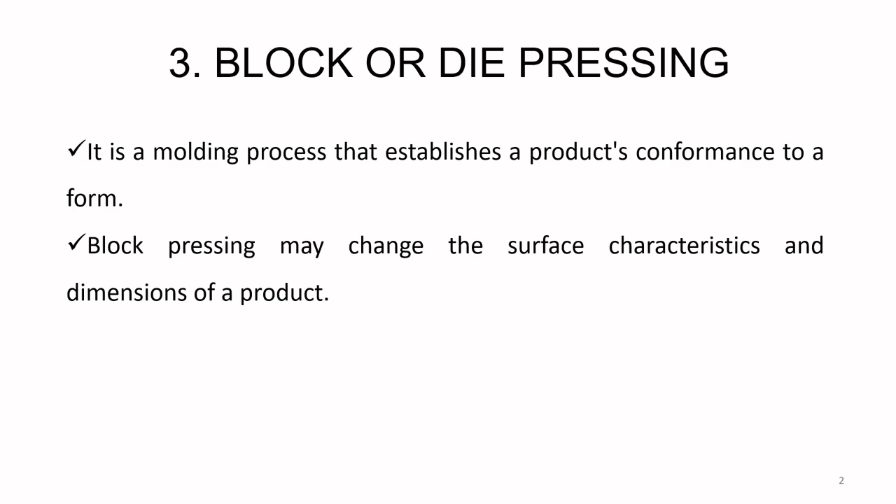Now, a factory which is doing all kinds of garments would not use this kind of die pressing. But someone who is only doing formal shirts will definitely buy this machine, because the ironing quality that you will get from this machine for the cuff and for the collar, that quality you will not be able to achieve from the handheld iron. That is not possible. So someone who only does formal shirts will definitely buy this particular machine.

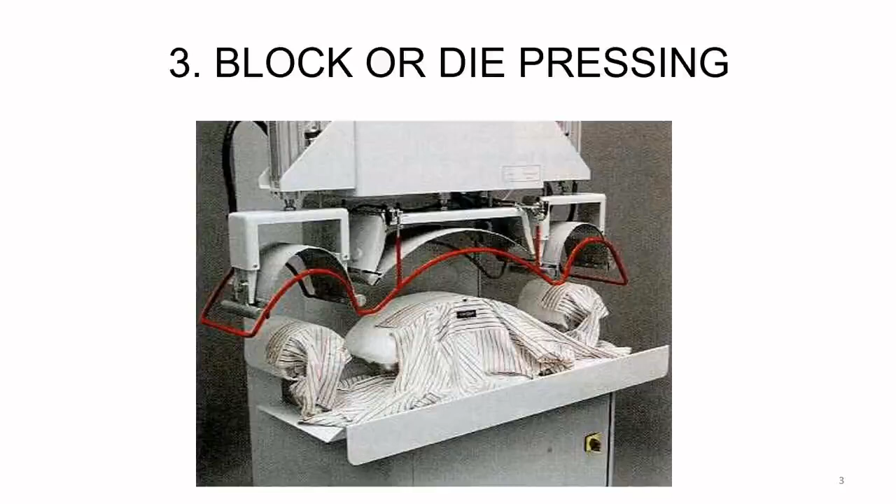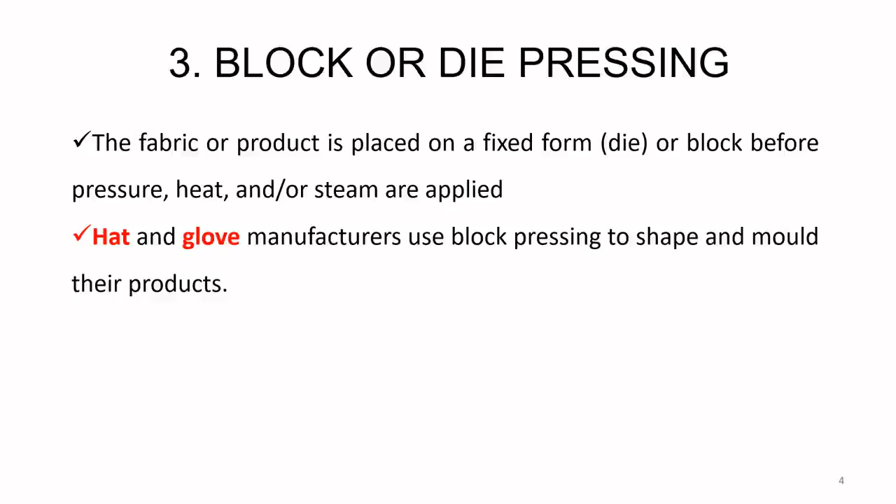Now, in case of block or die pressing, the fabric or product is placed on a fixed form or die or block before pressure, heat, and or steam are applied, like we saw in the previous slide. Hat and glove manufacturers use block pressing to shape and mold their products. The gloves that are used for taking out the dishes from the oven, because the plate is very hot, that glove has a particular shape to it. So the glove manufacturers use block pressing to shape and mold the products.

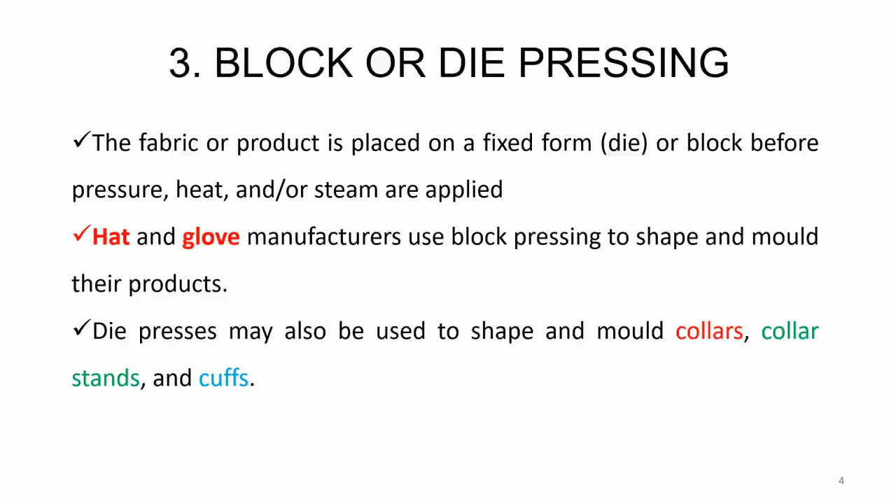Die presses may also be used to shape and mold collars, collar stands, and cuffs. That's what we saw in the previous slide. And block or die pressing can be used to fold and crease patch pockets and pocket flaps. And it's all automatically done. The operator positions the component over a die, whatever has to be pressed. So let's say it is a patch pocket. You place the patch pocket over the die.

Second, you switch on the machine. Third, there are folding blades which fold the edges of the pocket and hold the edges to the underside for the creases to be set. So imagine a pocket has been kept, it is folded from all three sides, and then it is lifted and put onto the shirt front, and then the stitching machine attaches the pocket to the shirt front. So the entire thing is automated, and the pocket may be automatically sewed.

There are dozens of videos on YouTube in which you can see that on one side of the machine, the shirt front, mostly the pockets are attached to the left side of the shirt, so the left front of the shirt is kept at one end. On the other side, you just place the pocket at the right place. The folders are going to fold the pocket from all four sides, lift and place the pocket on the front of the shirt. And then the stitching system is going to attach the pocket to the garment. It's the most beautiful piece of machinery.

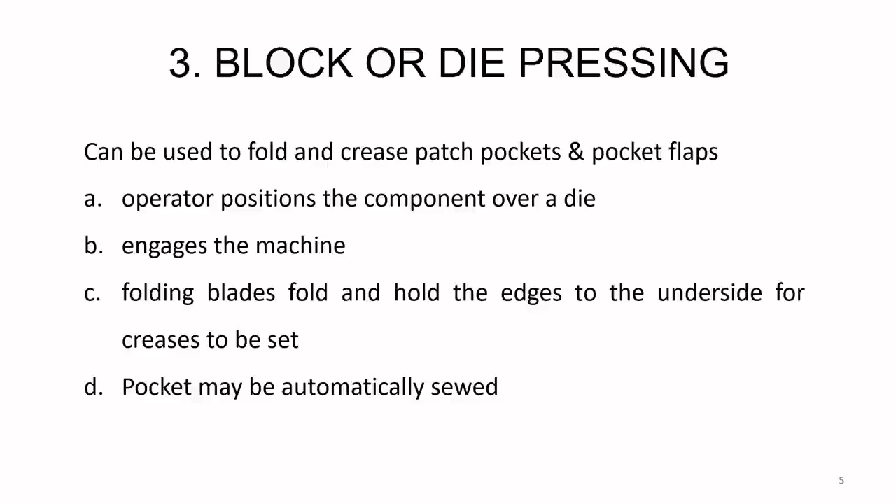So with that, we come to the fourth type of pressing, which is the form pressing. Now, form pressing is used primarily for the final pressing or for renovating garments in dry cleaning plants. So this is something which happens at the last, not in the initial stage. And form presses are made in approximate shape as the finished garment.

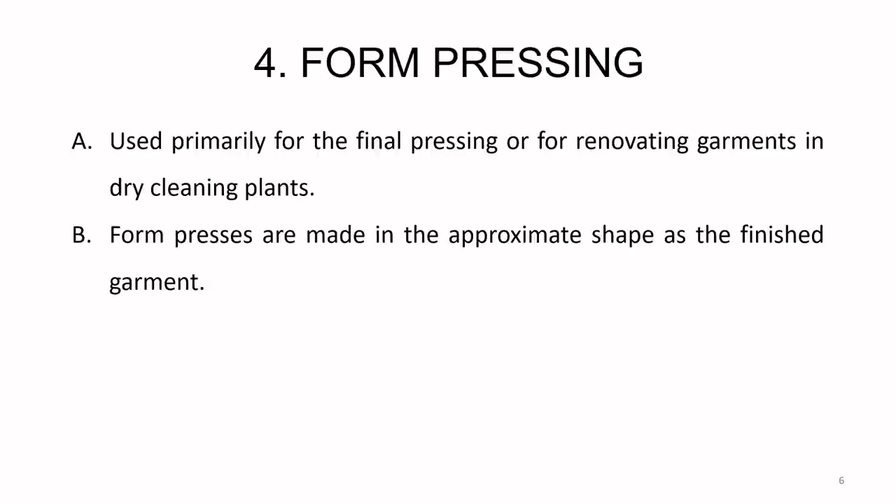And we are going to see the visuals, which is going to make it fairly easy to understand how the form pressing is done. And the expandable or collapsible bags are the most common type, like the example that we had discussed in case of pressure being applied using steam. So form pressing is that case where pressure is applied using steam, and the mechanism is that expandable or collapsible

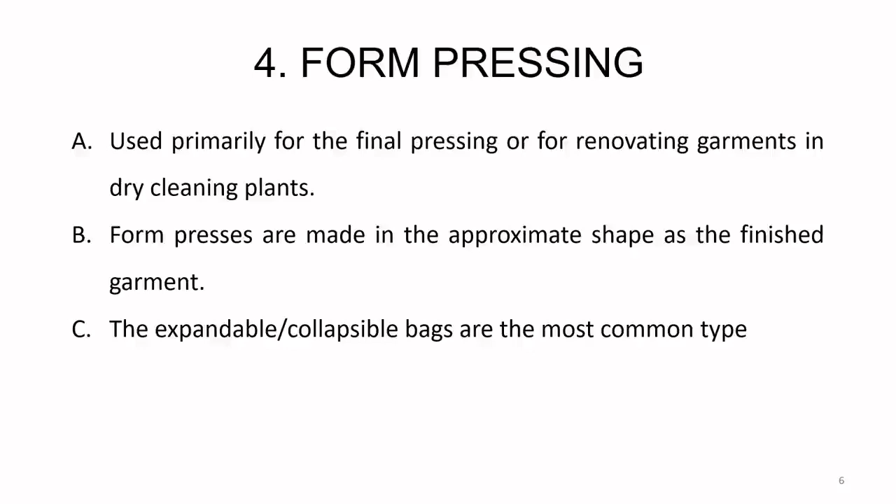bags are used. They are put inside the tubular parts, which is sleeves or the leg part of the trousers, and the steam is supplied inside these bags. The bags expand, and when they expand, they apply pressure to the garment part, and we'll see how.

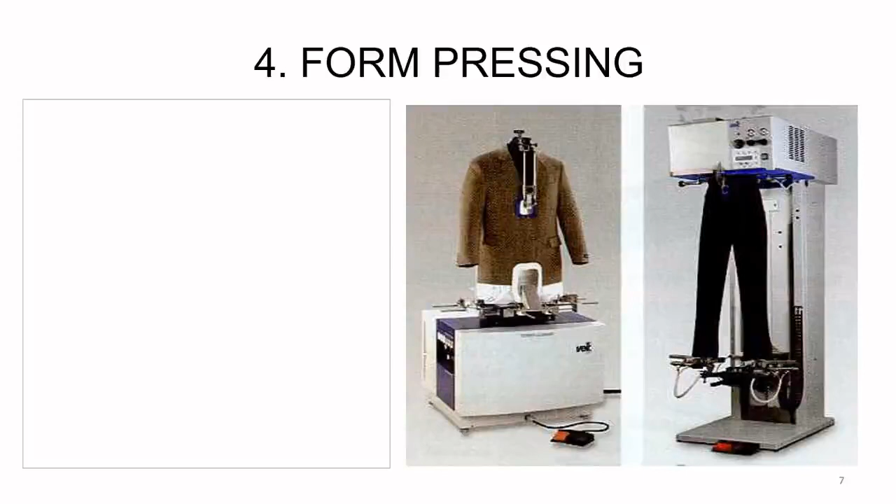So if you see the visual, there's a jacket which has been mounted onto the mechanism, onto the form press. On the right side, we have the trouser. It has been clamped at the bottom and at the top, and there is a balloon kind of thing, the collapsible bag, inside the jacket, as well as inside the two legs of the trouser.

Steam is forced from the inside of the form through the garment, while the form expands to fill all the space inside the garment. So that balloon kind of thing, or the bag, expands fully, and when it expands, it is going to apply pressure against the jacket or the legs of the trouser. It is expanding, it is applying pressure, and because there is steam inside, steam is being used to press the garment.

Form presses require the least amount of positioning and repositioning. Once you have put the jacket onto the form press, or you have clipped the trouser at the top and the bottom, that's it. You just have to press a button. Steam is going to fill the collapsible bag. It's going to inflate. It's going to press the garment for a certain number of seconds, and there you are done. You can remove the garment, put on the new garment, press the button, and again it will be done.

So in this case, you don't need a skilled person. You don't need a pressing man. You just need a helper kind of a person who simply is taught how to put the garment onto the form. That's it. Garment is pressed with one surge of steam. You press a button, steam will go inside, pressing is done. Next. That's it.

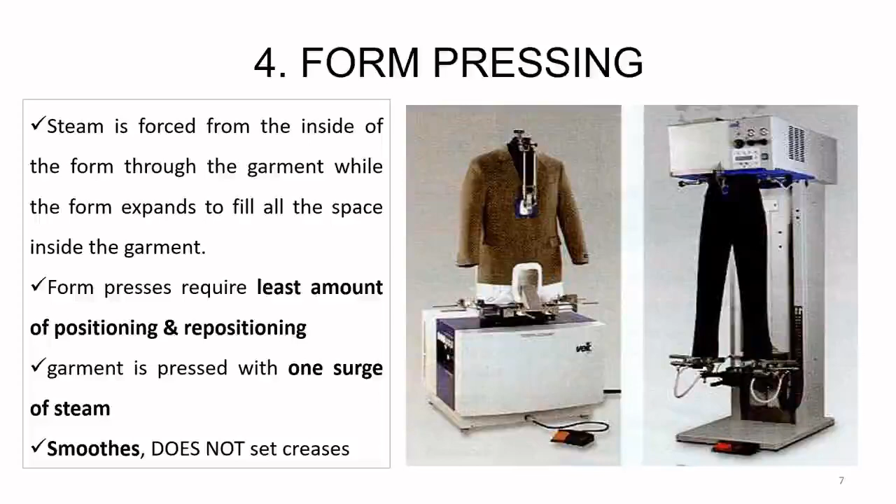One thing here, it smooths. It cannot set creases. It can only smooth. So whatever tubular parts you have in a garment, the collapsible bag will just inflate itself and it will press the garment using steam. That's it. You cannot set creases using form pressing.

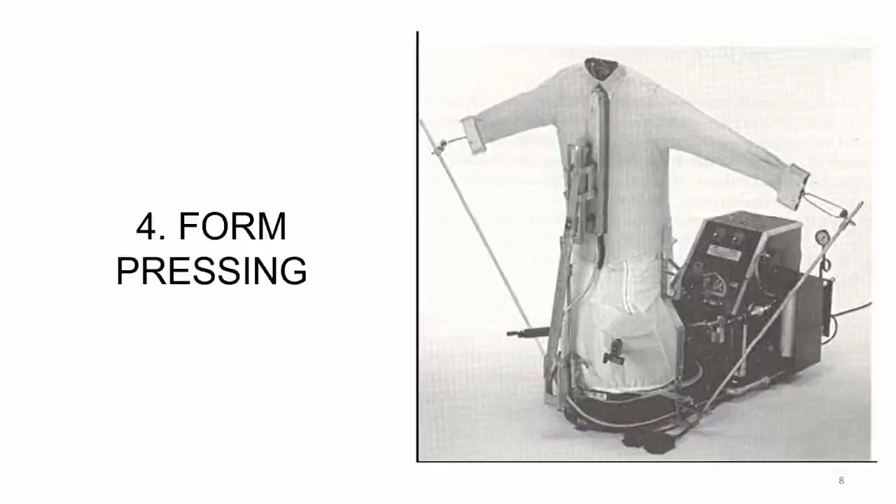This is another example where a shirt has been clamped. So the shirt has been put on the form. The sleeves, the cuffs, have been clamped on the two sides, and again you just have to press a button, and from the bottom the steam will be supplied. The collapsible bag will be inflated, and the shirt will be pressed using steam.

And now we will come to another category of equipment which are called steamers. Now, steamers are machines that use only steam to mold and smooth the garment. So steamers are going to supply steam, and there's going to be a lot of steam. There's going to be a jet of steam, or the entire room full of steam, or different other mechanisms, and no humans are involved, and steam is going to come in contact with the garment, and it would mold or smooth the garment. There are different types of steamers that we're going to talk about.

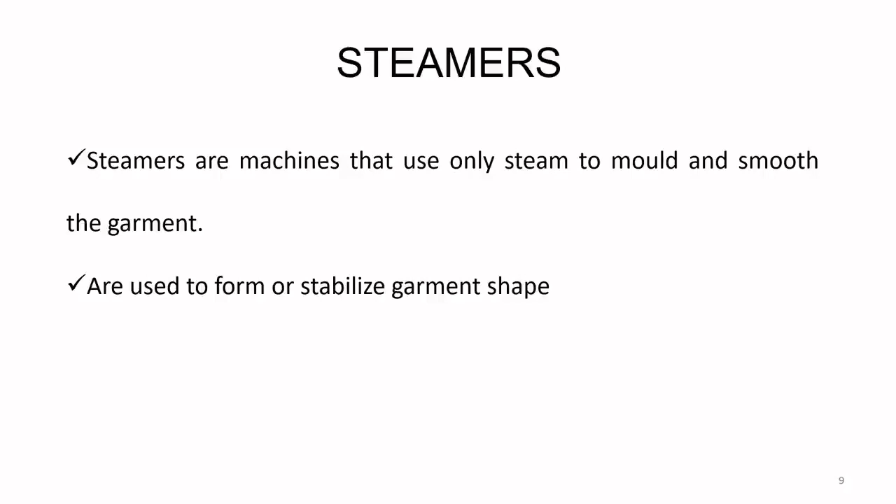And steamers are used to form or stabilize the garment shape. No creasing will be done, nothing of that sort, only smoothing. So they are used to form the shape or stabilize the garment shape. And they are also used to smooth the surface of the fabric.

Imagine a garment has been hanging on the hanger since, let's say, 20-30 days in a store, and now looks a little crumpled. So only with the help of steam, if you just give it steam, don't touch it, you're not using any iron or something like that, you just apply steam to it, and the surface of that garment will be smooth.

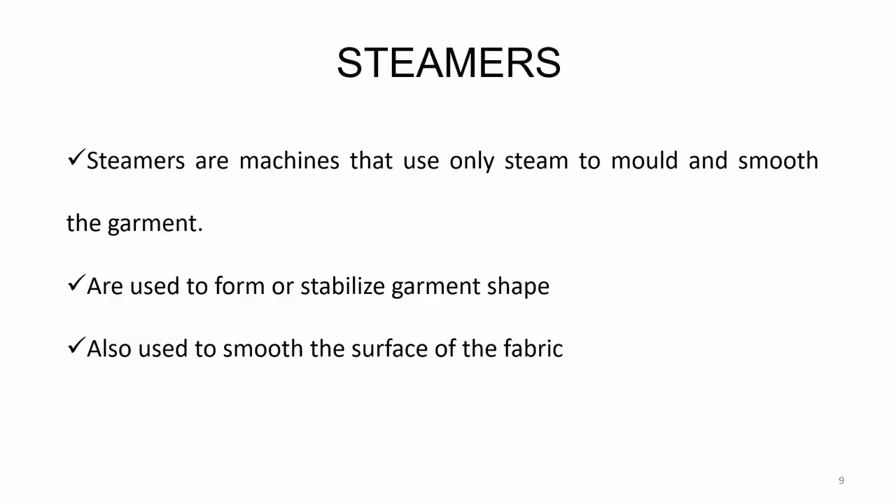Steam jet is where a nozzle is there through which there will be a jet of steam continuously coming out. What you can do is keep the garment, one garment over there, it receives a fair amount of steam, gets smooth, you can remove that garment and put the next one.

Or you can have a conveyor belt system where one garment comes in front of the steam jet, stays there for a while, let's say 10, 20, 30 seconds, and then goes ahead and the second garment comes in. So that's a conveyor belt system. That is where steam jet is used.

Steam gun is where it is handheld, it is portable. So you might not have a conveyor belt system, you don't have so much of budget and things like that. So you have a steam gun, the water can is attached at the bottom. You can hold it in the hands. It has to be powered by electricity. It's a gun which makes steam.

So you can actually go to the garment, and whichever local areas you see the garment is not looking good, a little crumpled or something like that, you can apply steam to that localized area, and you're done. So it's very, very handy.

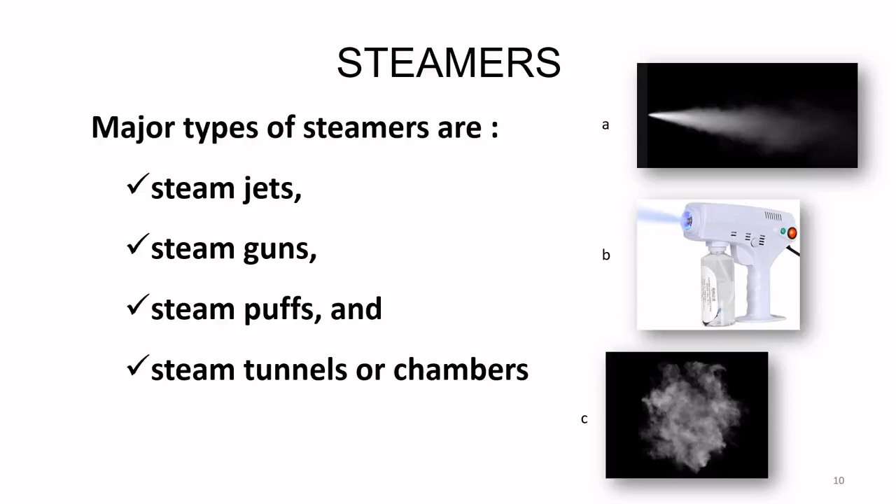And last but not the least, we have the steam tunnels or chambers, the big ones which can only be afforded by the bigger garment factories. Now this is a tunnel finisher. This is the smallest of the types. This is the steam tunnel. In this case, from one side the garment is going inside, and from the other side the garments are going to come out.

So what happens here is that a person is going to carry the garments and hang them on the rail, and that rail automatically goes inside. So from one side you are hanging the garments which have to be finished.

Those are going to go inside the tunnel, and once they are finished, they are going to come out from the other side, and another person is going to pick up those garments and take them to the packing area where they will be packed because they have been finished. So this is the steam tunnel with a very small chamber.

Now steam tunnels or chambers are used for finish pressing. Finish pressing means only once the garments have been stitched will they be brought over here. The garments are de-wrinkled within a chamber by the pressure of circulating steam. Inside this small chamber the steam is circulating with a certain amount of pressure. So the garments are finished by way of the convection current of the steam.

These may operate intermittently in case racks of garments are loaded or unloaded, or it can be continuous. Now, intermittent is, let's say 4 garments have gone inside for 2 minutes. 2 minutes gone, 4 garments go out and 4 garments go in. So when you start and then you stop and then you start and then you stop, that is intermittent. Continuous is in case of garments which are carried by rail or conveyor belt.

Now, in case when you have this big system, you will have a continuous system where from one side the garments are continuously going inside, and it takes about half a minute or 1 minute for the garment to travel the entire path inside the steam chamber and then come out. So in that case, garments are continuously entering the chamber from one side and continuously coming out from the other side. That is the continuous system.

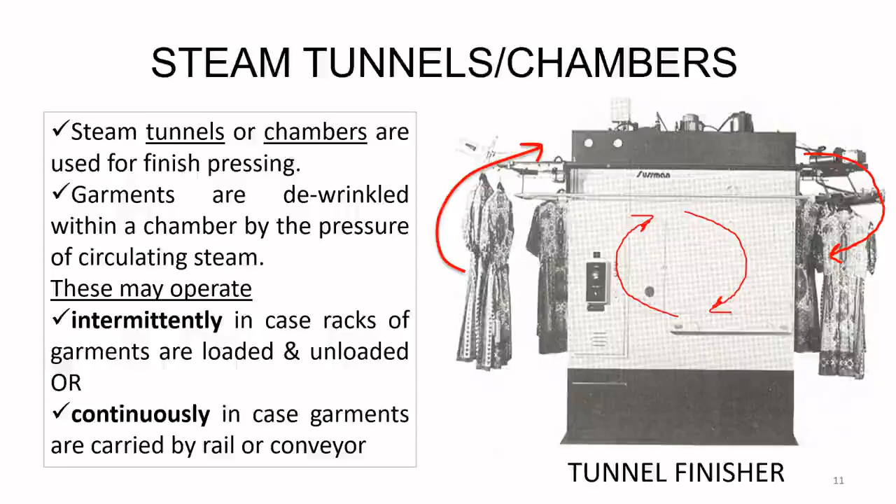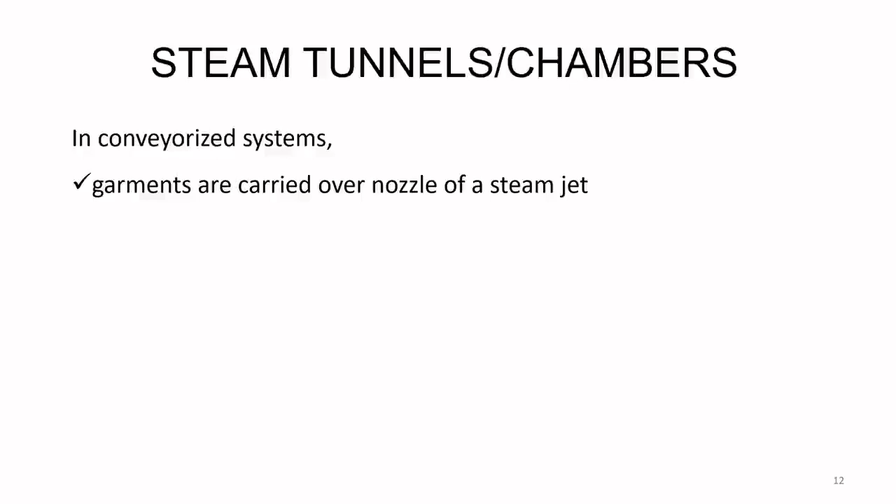Now, in conveyorized systems, the garments are carried over the nozzle of a steam jet. So you have a lot of steam jets, and in front of the steam jets, the garments move through the conveyor system. They move in front of the nozzles, and by the time they have crossed all the nozzles, the garments are already finished.

Sometimes a dry heat chamber is used to extract moisture from the garments before packaging. Now, sometimes when we use moisture for some processes, before we pack the garment, we have to remove the excess moisture in the garment. So in that case, we use a dry heat chamber.

Now, the heat chamber is the same, just that steam will not be there, only hot air will be there inside. And the same process will be used. The garments will go inside, stay inside for a while, and the dry heat is going to remove the moisture, is going to vaporize it. And the garments come out, they are dry, and now they are safe. They can be packed.

Steam tunnels are used when creasing or molding isn't required. Now, please remember, steam tunnels cannot do creasing or molding. They can only finish the garments, can only smooth the surface of the garment. Garments are carried through a steam chamber for final finishing. So what's happening here is that you have done the ironing and everything has been done. Then someone is going to do the final inspection. Someone is going to attach the hang tag, the price ticket, etc.

So when these things are happening, the garments which are ironed, their ironing has gone slightly awry, they are not so well ironed now, because while people have been attaching stickers and other things to the garment, it becomes a little bad. The ironing has gone a little bad. In such cases, we use the steam chamber for final finishing. You don't have to iron it again. The steam chamber will take care of the basic minimum smoothing of the surface of the garment.

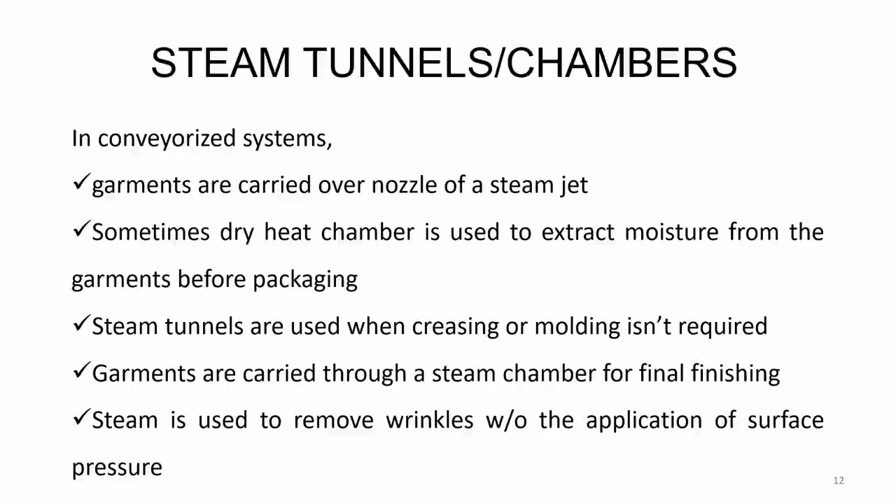Steam is used to remove wrinkles without the application of surface pressure. So, in case of steam, there is no surface pressure. There are only steam tunnels or chambers with a steam puff or steam jet or steam gun, which are used to remove the wrinkles.

Now we come to the end of the sections where we talked about ironing, pressing and steaming. In this last section, we are going to talk about some of those things that are part of finishing. And the first one is thread cutting or trimming. Now, when we do the stitching, there is some amount of loose thread at the start of the stitch and at the end of the stitch.

Now, that loose thread is categorized as a defect if the loose thread is more than, let's say, 1 centimeter. So those loose threads have to be removed. So there are these thread trimmer or thread cutting machines. On the left side, you have the thread trimmer, just like we have the trimmer for our beard.

So similarly, we have this trimmer which only sucks the thread and cuts it, and does not damage the garment. On the right side, we have this system where you have this B point; you have the nozzle over there. At the nozzle, you place the garment where you see the loose thread. You don't try to cut it with a scissor. You simply place that garment over there where you find the loose thread. The suction is going to suck the thread, cut the thread, and you can remove the garment. So this is one way of removing the extra thread without damaging the garment or the fabric.

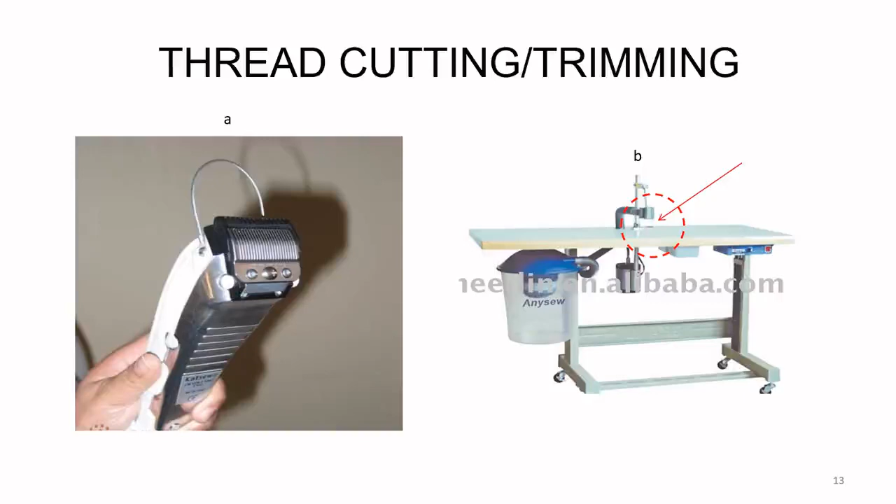In the process of making, the garment may get dirty or may have some oil stains or some kind of spots because of washing, because of any kind of operation, while cutting, while stitching, while washing, etc. So once the garment has been washed and there is still a spot which could not be removed with the help of washing, those garments are brought over here to remove these spots.

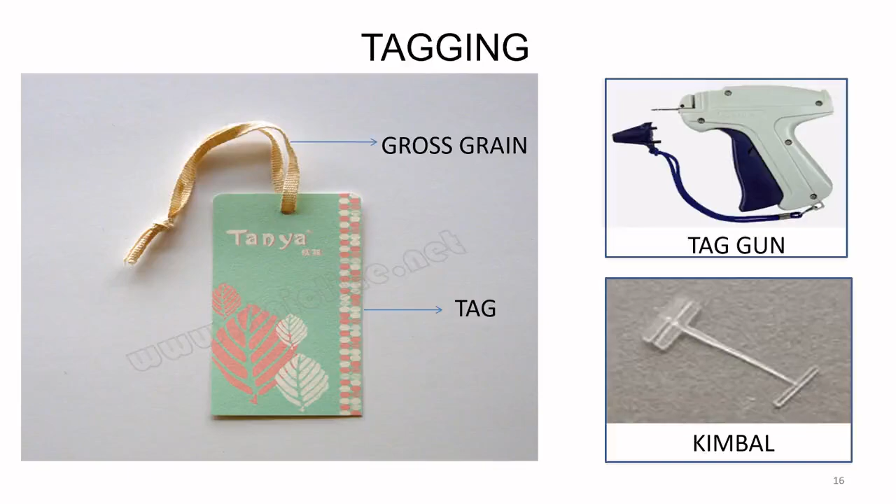And then comes the packing method. Now, packing method is, to summarize it, a garment is either folded or it is hung from a hanger. So you can fold it and put it inside the carton, inside a poly bag. You can fold 10 garments one by one, and then you can put 10 garments inside one big poly bag. It's called a blister. Now, that is flat packed without any hangers.

Then we have flat packed in cartons on hangers, where hangers are there, you have flat packed the garment and you have kept it inside the carton. And one is where you have flat packed in cartons and you have kept the hanger inside the carton. Once it reaches the destination, you open the carton, you take out the garments, you take out the hangers, then you put the garments on the hangers and hang them in the rails in the retail store. So there are various methods of doing it.

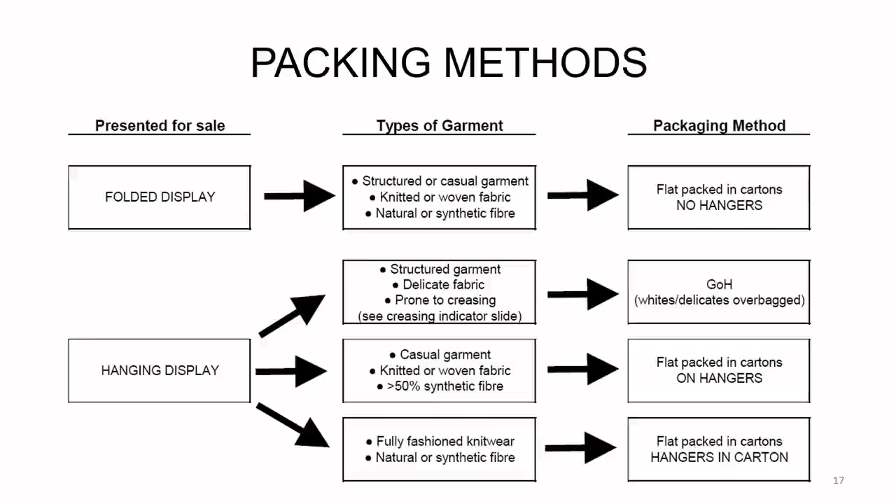And then last but not the least, one very important thing is the poly waste. So much poly bag being used, so many cartons being used, so many stickers and everything. Now buyers like H&M are strictly against this. They will tell you that this is the method of packaging in which the least amount of poly bags and the least amount of cartons are used.

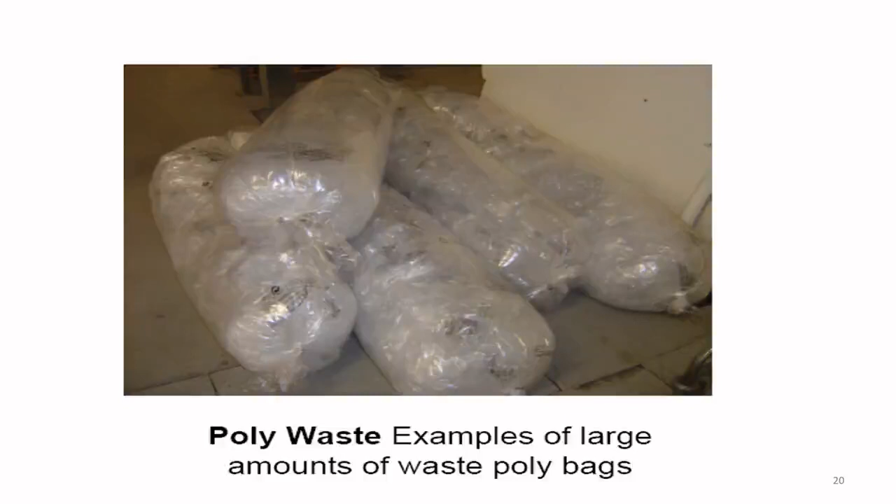So today poly waste is a big hazard, which is not really being considered as of now in the Indian market. All these Levi's and UCBs and Wranglers of India, what do we do with all the poly waste? So that is again one big question mark on sustainability when we are talking about packing of the garments. So with that, we come to the end of this session.